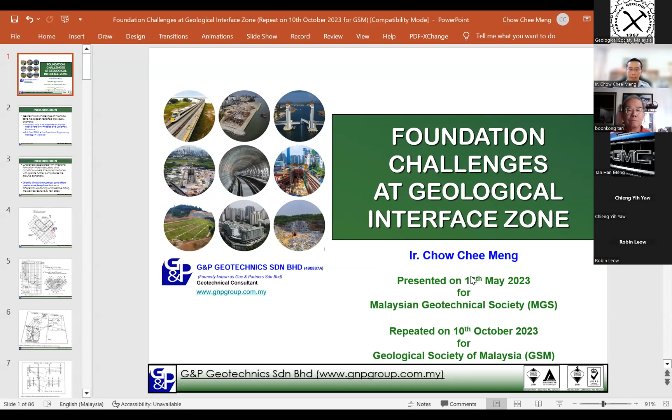All right, so the title of my presentation today is Foundation Challenges at Geological Interface Zone. Just to give a quick recap, I actually presented this same set of materials on 16 May 2023 for the Malaysian Geotechnical Society, and then Professor Tan asked me whether I could repeat it for GSM. So that's where I am today.

My presentation is from the perspective of an engineer, because my experience and training is on geotechnical engineering. On the geological aspects, I'm mainly basing it on observations and information I've obtained. Maybe some of you here would be able to give me more insights with regards to some of the information I'll be sharing today. Let's go straight to the topic at hand.

A quick introduction: geotechnical challenges at interface zones have been reported previously, for example by Mitchell in 1985 in a paper published for the Southeast Asia Geotechnical Conference. He discussed the challenges his team faced in designing foundations for the Pan Pacific Hotel on pinnacle and cavernous limestone. I believe most of us are familiar with this structure, near the UMNO building, somewhere in Chow Kit. Previously it was known as the Pan Pacific Hotel.

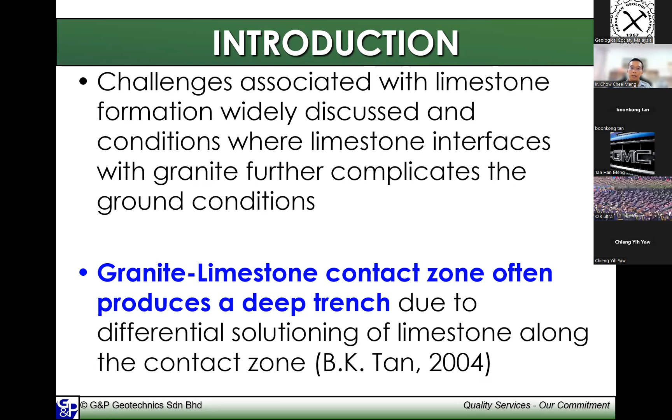Towards the top of this line, it's actually shallow - the term is shallow, where it's less than 100 feet, that means it's less than 30 meters. Whereas the moment it crosses this line, it's actually very, very deep - the limestone is more than 30 meters.

So the original building as such gives some challenge, which is very costly to overcome if the building is positioned as such, where you have big settlement at the area with very deep piles. Of course, then you have much lesser settlement at the area with shallow bedrock. On top of that, at that time in the 1980s, even now I believe, it's very difficult to form piles at depth which is very, very deep.

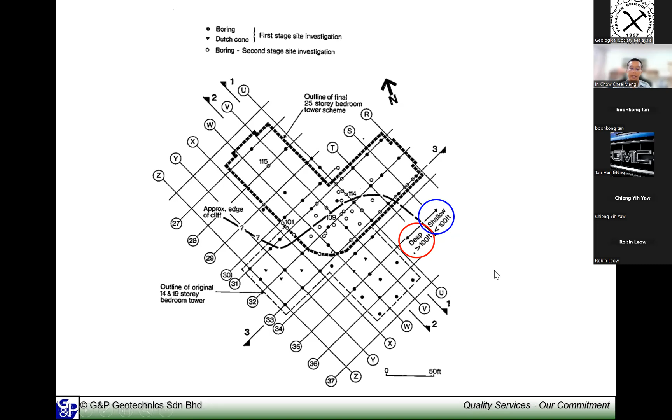So the strategy adopted at that time was that the designer decided to carry out a study on the performance of the piles. Basically, they divided it into two zones: the shallow pile, which is less than 30 meters deep, designed with a 1.5 meter rock socket into limestone, and the deep pile, which is on average about 75 meters deep, requiring barrette piles.

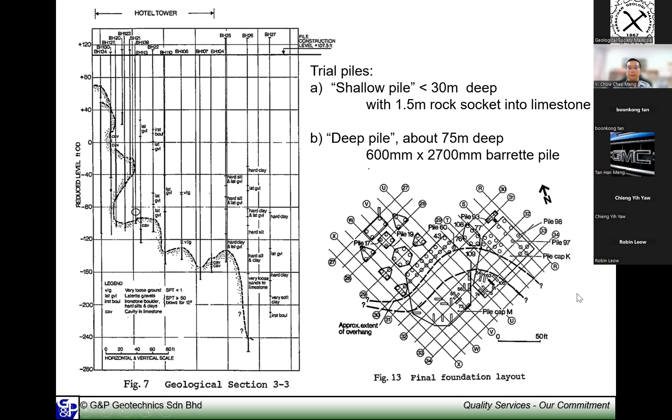I'm a bit curious about this particular approach. Probably, my guess is at that time, the design decided to avoid the contact zone because of the uncertainties with the behavior of the soil. So the subsurface investigation is concentrated at the granite zone or the limestone zone.

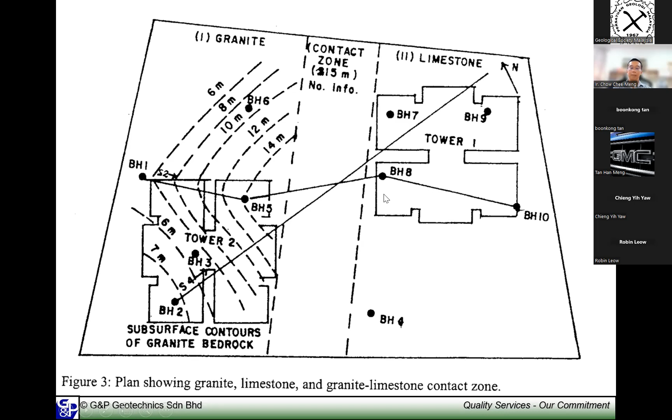Anyway, just to put into perspective, on the left-hand side of the plan, you can see the granite bedrock depth actually goes deeper and deeper as it goes towards the contact zone. The limestone level is also quite shallow, but at the contact zone, it's suspected that the level will be very deep because of the differential solutioning that I mentioned earlier. We don't have information here, but from the understanding of geology, I think the possibility is very high that the bedrock here tends to be deeper.

So from the two simple papers that I referred to in this introduction, I just want to set the tone in terms of the main message I want to convey to my fellow practitioners in geotechnical engineering or geological works: at a geological interface zone, we have to be extra careful on the ground conditions.

Just to elaborate further, what I mean is basically we cannot do business as usual based on our normal practice. In those areas, we have to put more thought into the investigation, the planning and the scope of the subsurface investigation. Even though it's a very simple tool, it becomes very important because it allows us to plan ahead and mitigate the risks and challenges ahead, rather than giving us unpleasant surprises during construction.

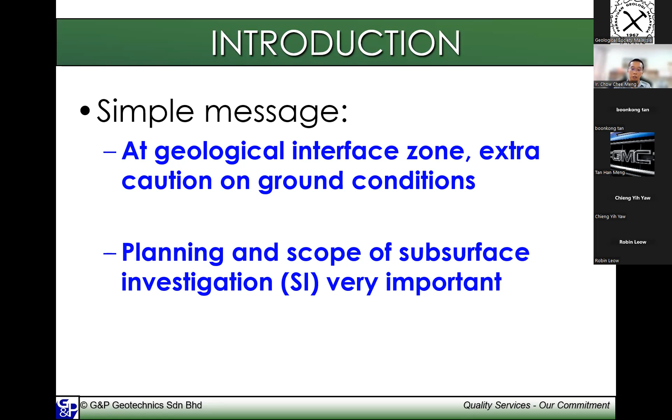Now I move into actual case histories from my own projects. In this presentation, I'll be sharing two case histories. Case history one is on the granite and limestone interface zone. I'll share the observations we obtained from the subsurface investigation information, and how, from the engineering point of view, we address the situation to make sure the foundation is adequate and achieves the intended purpose of supporting the structure and the architectural intent of the development.

For those who may want further readings about these particular challenges, the materials I'm presenting here were published in a paper in 2019 for the 16th Asian Regional Conference on Soil Mechanics and Geotechnical Engineering in Taipei, Taiwan, with my colleagues Kho Shiau Ying. The paper should be easily accessible from my company website or on the internet. Those interested can communicate with Professor Tan, and I'll be happy to share it.

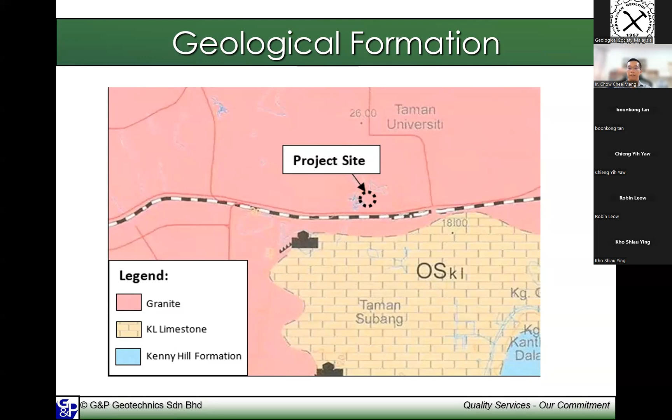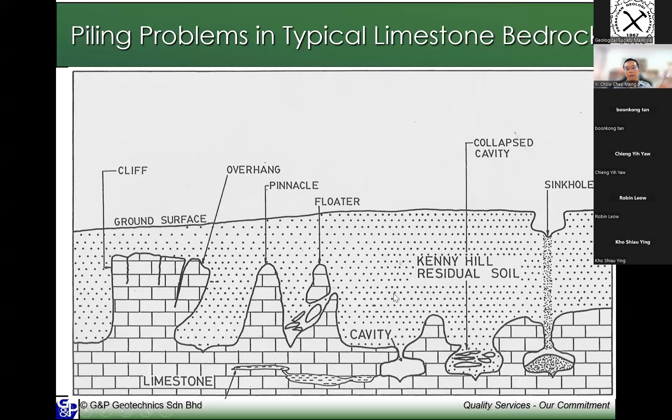So like I mentioned in the introduction, we are well aware of the problems in typical limestone bedrock. We are very worried about features such as overhangs, pinnacles, floaters, cavities, collapse cavities, etc. There are many discussions about this already. So if you have an interface zone, you have to cater for limestone at the same time as the interface zone.

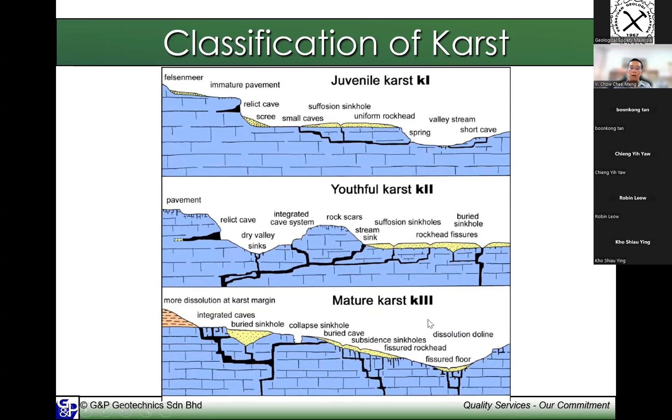The category that we describe is karst K3. I'm sure my geological cousins here are very familiar with this, and they will use this description much more often than myself. Of course, if you have complex karst, you have all these kinds of issues which are quite common in Malaysia. And extreme karst has all the different types of challenges associated with adverse features of karst.

Okay, for this particular site, actually it's in PJ near Kelana Jaya area. We were very lucky that we had a very supportive client. The client came from an engineering background and understood the importance of SI, and this particular client is not the type that saves on SI.

The moment we highlighted to them that there is a potential issue related to the ground conditions here, they asked us to carry out as many boreholes as possible, because they knew that more boreholes reduce potential problems during construction, which is true enough. From all the information we obtained, I think the construction was able to proceed relatively smoothly despite a very complicated site.

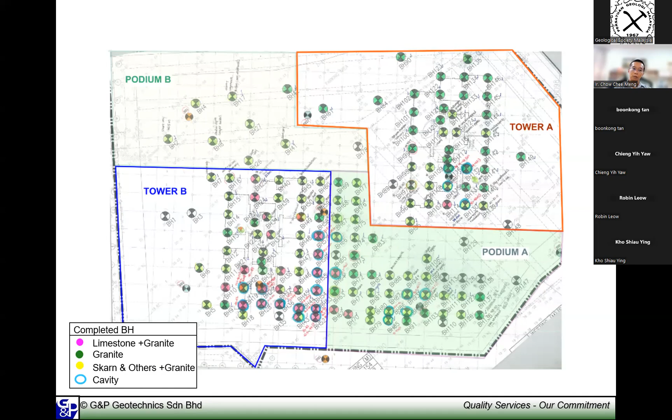But when it comes to Tower B, based on the colors shown here, we have far more limestone at the Tower B area. Even for me, this kind of situation is not something I encounter every day. Most of my projects, since my graduation over 20 years ago, I think I've only encountered such a situation 2 or 3 times throughout 20-plus years of working.

Just to show you from the bore logs, this is how my company summarizes the borehole information. We plot it to the existing ground level, and this legend shows the SPT N values, along with the major and minor components of the soil.

At the granite zone, it's nothing really too different from some of the other projects we encounter in granite zones, where SPT N gradually increases with depth. The green color is the type of granite rock we encounter from the boreholes, and the bedrock level is typically about 40 to 50 meters below ground level. Very interestingly in this area, some of the boreholes at the top show some schist just before encountering granite.

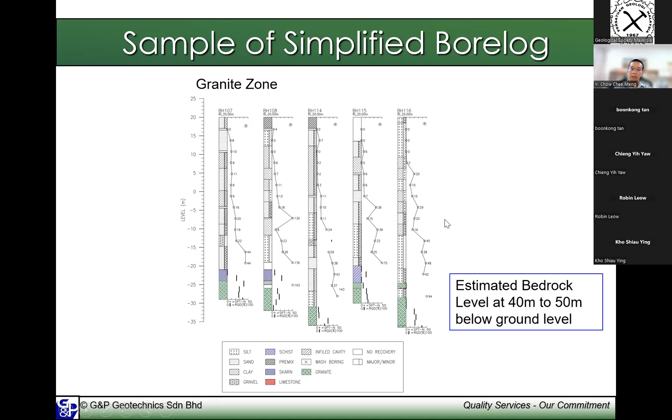So again, I do not know the real reasoning for this. Maybe the geological experts here will be able to shed some light on it, but from the observation here, there's a very clear trend in the occurrences we have encountered.

Now, the interesting part is the limestone granite zone. The red color shown is the limestone. If you look at the plan, it's not consistent in all the boreholes - some of the boreholes have it. These are extracts of some boreholes where we encountered limestone floaters.

The challenge here is that the level where limestone floaters are detected varies. Some is as shallow as 20 meters below ground, some is deeper, about 40 meters below ground, with floaters only between 20 to 35 or 35 to 40 meters. The thickness also varies - some are relatively thin, maybe 2 to 3 meters, but some are as thick as 20 meters.

The problem with this interface zone from a foundation point of view is that we do not know how widespread this thickness is. Secondly, after coring through the limestone, there is a considerable thickness of soil beneath it - definitely more than 5 meters, close to 10 meters, some definitely more than 10 meters. The SPT N values are quite low, in this case 7, 11, and 14. This one is typically less than 20, in the region of 16 to 20.

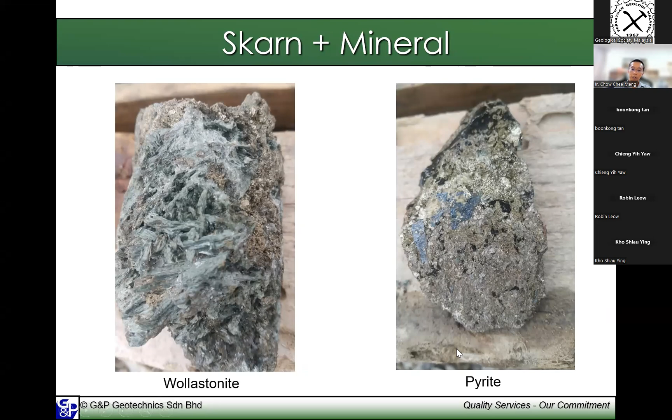For this particular site, because of the interface zone, besides granite and limestone we have different types of minerals and skarn that we have encountered. Here we have wollastonite, according to our geologists. We also encountered some pyrite, fool's gold, and some breccia as well in the interface zone. So we have all different types of rocks and minerals.

One of the challenges we have to overcome from the geotechnical engineering point of view is that because there are a large number of floaters which vary in thickness, extent, and nature, the piles are designed to socket into competent granite bedrock. That means we do not want a situation where some piles go to granite bedrock while some sit on the floater, causing different settlement. The strategy is to bore through the limestone.

Of course the result from the SI is very convincing. This is a value from the SI. The result from the SI is very convincing, and as the project team we were also able to work out what the cost impact to the foundation would be. Despite this, the project is still viable, and I think it's very successful because phase one of these 2 towers is completed, and they are launching the new phase as well.

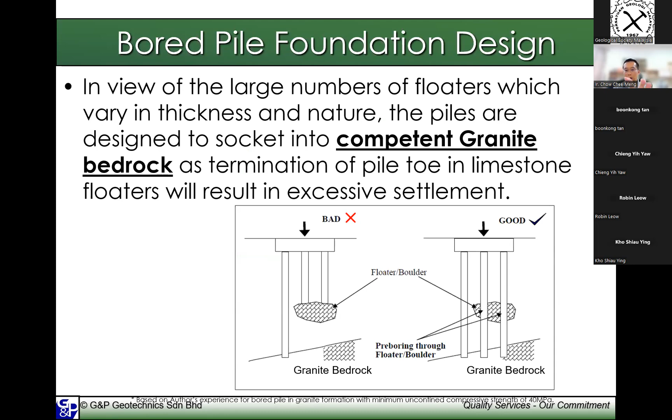Once we agreed on the approach towards the design of the foundation, we wanted to verify the performance of it, whether our assumptions are valid or not. The design parameters we adopted include the shaft friction in soil, 2 times N value. The shaft friction in granite is based on 1,500 ultimate value, based on our experience for bore piles in granite formation with minimum unconfined compressive strength of 40 megapascal.

We usually limit the end bearing to about 15% of pile working load to limit the risk, because the end bearing for bore piles depends very much on the contractor's workmanship. If the contractor is willing to clean the bottom of the bore pile better, the end bearing can be very high. But because of constraints in time and productivity, we have to make a judgment to limit the end bearing to a certain percentage that is low enough, so even if they don't achieve it, the foundation will still be safe - while still being economical.

Another tool we use quite regularly to determine the competent bedrock - historically, many years back, how supervisors verified the construction of bore pile rock sockets was based on the supervisor's experience. If the rock felt sound enough based on how difficult the machine could core through it, or the sound of the coring, he would accept it. As you can imagine, there's a lot of subjectivity, a lot of contractual arguments. Of course the system is not perfect, but we try to reduce such arguments.

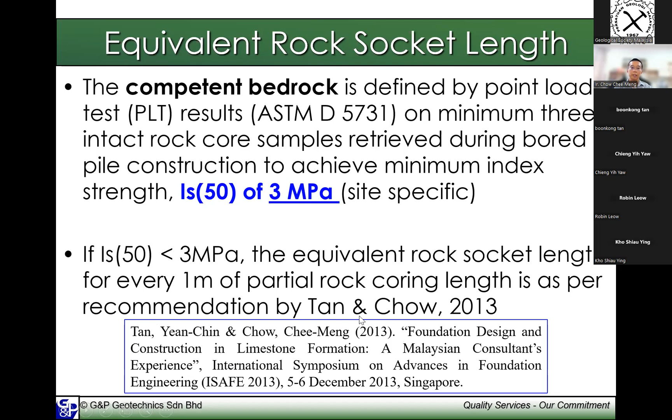So if you encounter materials less than 3, it doesn't mean they're not considered rock socket, just not full rock socket — equivalent to 60% of it only. So if the original design is 3 meters, they have to lengthen it by more than 3 meters, probably close to 5 meters. 3 divided by 0.6 is close to 5 meters.

But we note to the contractor that since this material is of lesser strength, they will only get paid based on the original 3 meters, even though they may be drilling 5 meters — they still only get paid for 3 meters. This is important, otherwise you can't control the quantities with certainty during construction, and there will be a lot of variation orders. The key is that this is communicated clearly and early to all tenderers so they know what they're pricing for.

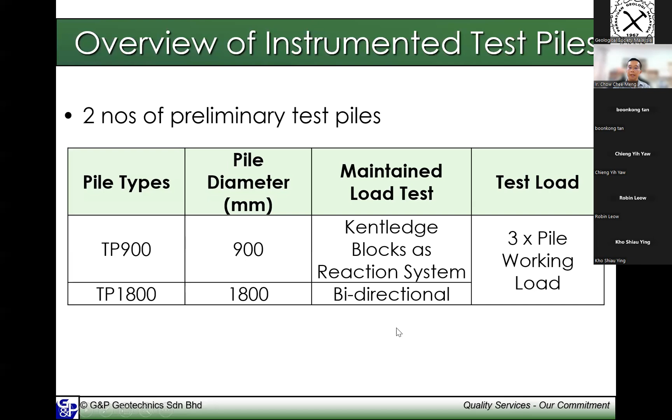This shows typical instrumentation. We always instrument with strain gauges and telltales to monitor settlement and mobilized capacity — similar sets of instruments, strain gauges. The difference here is we have the hydraulic jack for bidirectional tests, because the test load will be very high, so bidirectional is more practical. In fact, I don't think it's safe to use kentledge for such a large pile diameter and large test load.

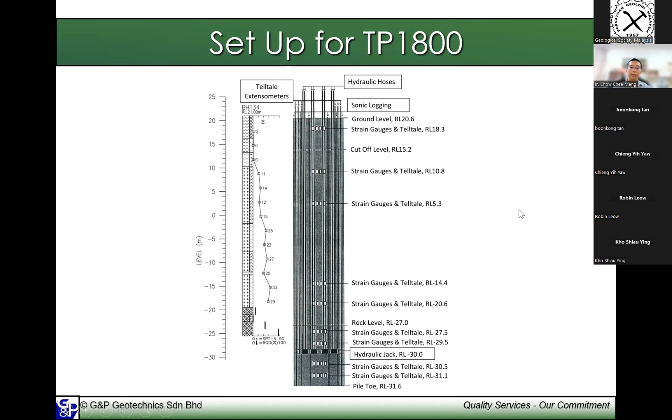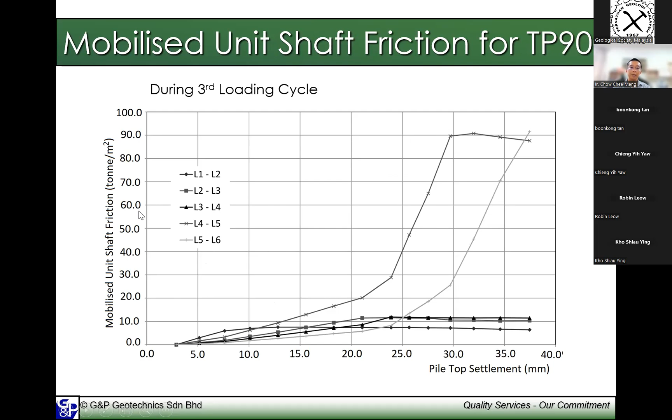So this is the typical results we obtained. This shows the level of the strain gauges. As you go deeper, at the rock, this gets about 900. Soil is close to about 100 kPa or 10 tons per square meter. End bearing for 900 diameter achieves about 35 millimeter settlement — this is what I meant — end bearing for a bored pile usually requires quite large settlement before it mobilizes the end bearing. This one settles about 35 mm and mobilizes about 3000 kPa.

For the bigger pile diameter, bidirectional test, you can see the rock shaft performs better, close to 1400. Soil is about 150 to 200.

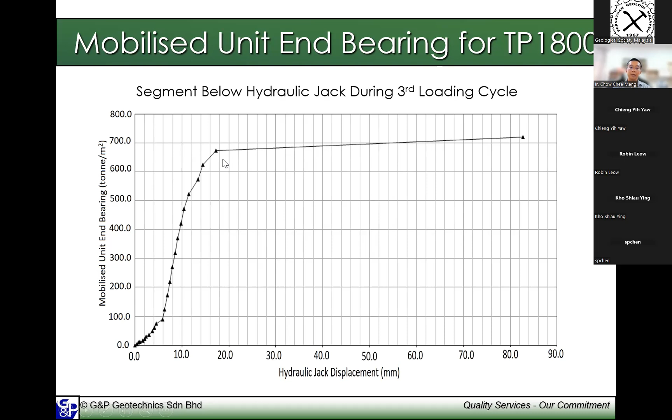The same thing, because we have 2 portions of the instruments. The rock below the hydraulic jack also reaches about 1300 to 1400 of rock friction. And here, for this particular pile, 1800, you can see that it achieved much better end bearing. It can go as high as close to 7,000. This is 700 ton per meter square, that means 7,000 kPa. So it reaches during the 3rd loading cycle.

Whereas, as I explained earlier, on end bearing, because of uncertainties in the workmanship, you can see that the range can vary quite widely, from as low as 1,900 for this particular pile, 900 diameter pile, to as high as 6,750 for a bigger diameter pile. One thing we can observe is that for TP1800, the soil friction is much higher, but we don't believe this is true because we notice slight pile bulging on the top portion of the test pile, which may have contributed to the exceptionally high value of shaft friction.

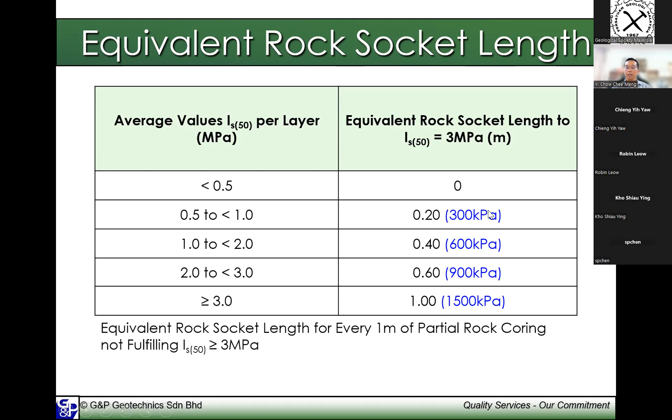Despite this, later on I will explain both test pile results here show that the design parameters assumed are well represented to the ground condition when we adjust it based on site obtained IS value. What I meant is that if you recall earlier, our design is based on, if you encounter a point load strength of more than 3 megapascal adjusted for the 50 millimeter diameter size, then the assumption is that it should achieve about 1,500 kPa of friction. But if you have more weathered materials, then the assumption is that you should reduce the frictional capacity of the rock as well. And this is what happened.

You can see from the 900 diameter piles, in fact for the upper layer, the point load, we know that we get about 900, close to 900 kPa of shaft friction. And if I divide 900 by 1,500, the ratio is about 0.6. And therefore, if I divide my calculated equivalent rock socket length, 1.47, by the 2 meter here, I actually get 0.7. So if we use a method where we adjust the rock socket, we will be getting very similar performance. That means it's in order.

And if you look at the other pile, why the friction is higher, in fact the IS value is consistently quite high, from more than 4 to about 8. And that's why we get frictional value much higher, close to 1,400. And if you talk about the actual equivalent rock socket length, it ranges typically about 0.9 and matches closely with what we have assumed as 1. That's why the summary is that the approach we have adopted, based on equivalent rock socket length, works well because the shaft friction tallies with the point load test results with some correlations on the recovered rock during bore piling works. I think this is a very important message.

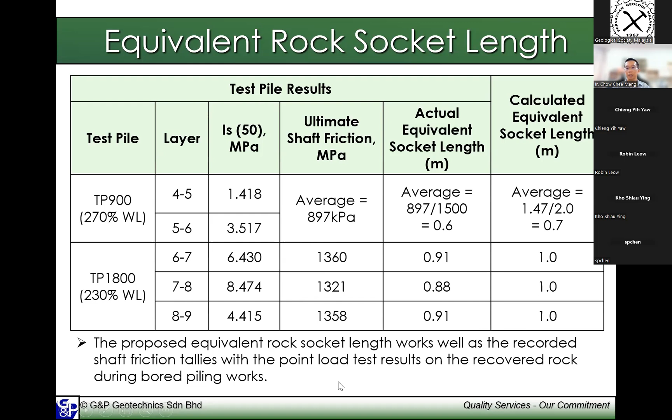So the conclusion, a simple conclusion for the first case history, before I move on to the second case history, is that at Kuala Lumpur limestone granite interface, we encountered limestone floaters with irregular thickness. So again, the message is very simple. It's very important to have adequate rock coring depth during soil or ground investigation works.

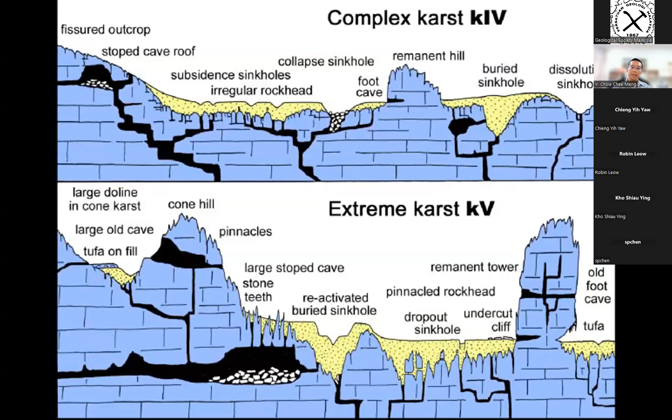And you only can do that if you are looking for it. Just to recap, for example, if you don't look into it, you may be thinking, all right, I terminate my borehole here, and you design your pile as limestone. This can be very dangerous because ultimately, in certain situations, let's say during construction, you actually encounter this while you're doing the bore pile, you puncture through it, then you have a lot of question marks. So these are the important things that you must look out for.

So the bore pile foundation system was selected to socket into granite bedrock, and the instrumented test results match well with the assumed design parameters. And one important message is that it only matches well when you use it in conjunction with the adjusted rock socket length based on site obtained point load index strength, which I think is a useful tool to adjust the rock socket based on the degree of weathering or strength of the granite rock encountered.

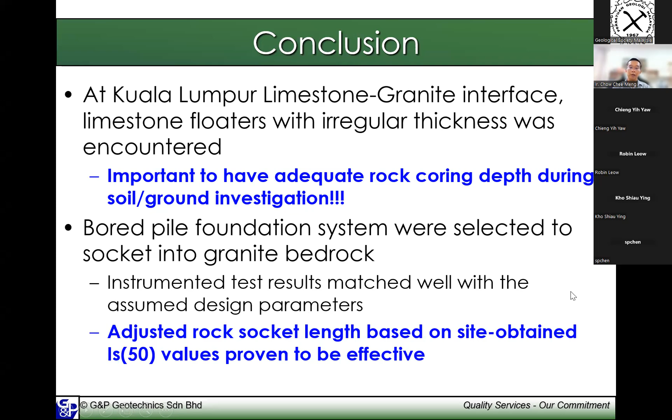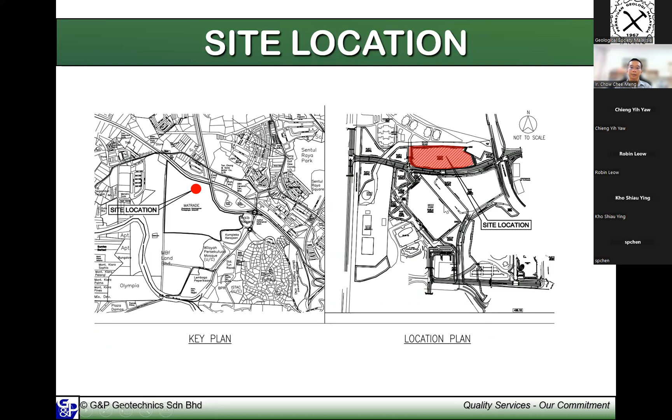Okay, for my second case history, it's slightly different. Just now was on the limestone granite. This is on granite and Kenny Hill interface zone. This particular site is not too far from MATRADE. From the geological map, the site location indicates that it's near to the granite Kenny Hill formation interface zone, and in fact not too far from limestone as well. But in this case, from the SI, we didn't encounter any limestone.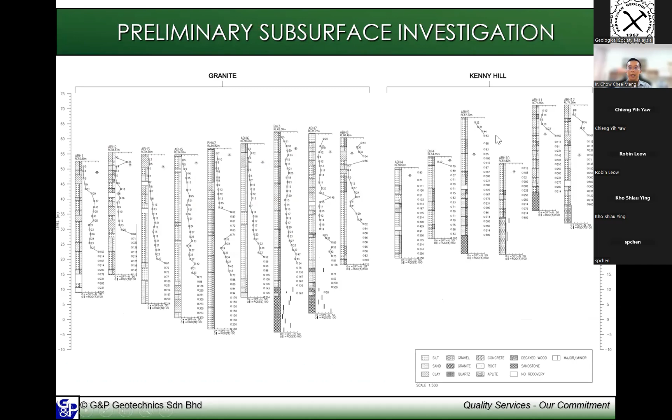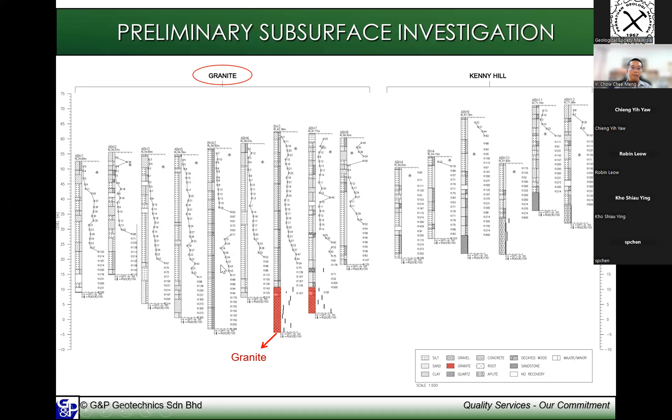What we meant by that, you can see from here - these are some typical borelogs between the granite zone and the Kenny Hill zone. For the granite area, some boreholes encountered granite, but the rest, despite going to depths close to 60-70 meters, have not encountered any granite - it's completely decomposed granite with very high SPT-N values. Whereas for the Kenny Hill area, the main difference is that the hard layer is very shallow, and we encountered different types of materials - sandstone, and weathered rock with SPT-N more than 200. I'll show you a more close-up view with two typical borehole information to further illustrate the differences.

You can see from the engineering point of view that what we have to tackle is that in the granite area, the hard layer encountered - when we say hard layer, we define it as SPT-N more than 50, because that is a suitable founding layer and where the pile derives the most capacity, meaning the most efficient layer to derive pile capacity - ranges from 28 meters to 36 meters below ground level.

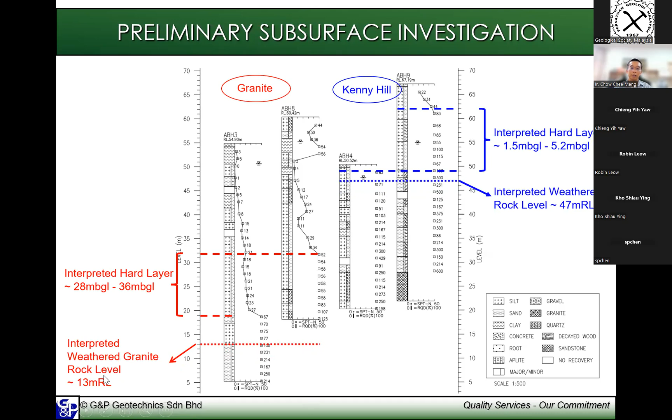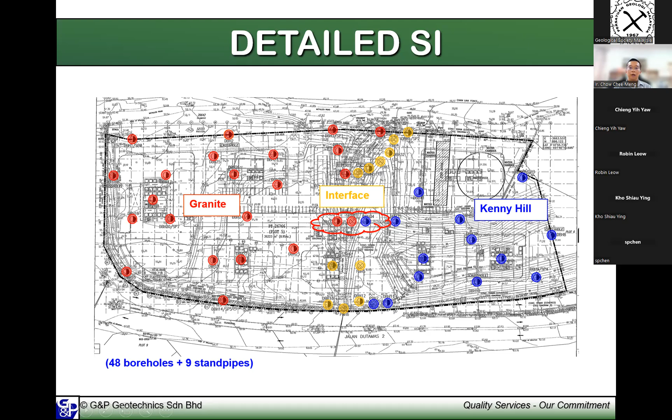For the detailed design of this project, having established that there are two distinct geological formations at this site, I've color-coded the red boreholes - their soil profile characteristics are closer to the granite, so we term it the granite site. The blue color is the Kenny Hill site as shared earlier. In between, at the interface zone, we have behavior which is a mixture of both granite and Kenny Hill. What I mean by interface zone is that you have some soil layer going down, then the hard layer is in fact deeper.

Immediately next to it, you can see that this is Kenny Hill zone. Again, the hard layer is very shallow. In this case, at the interface zone, the hard layer is deeper. But the moment we encounter hard layer, it exhibits characteristics quite similar to what we encounter in the Kenny Hill zone - a zone of materials with SPTN more than 200 before encountering granite in this particular zone. So here we have to devise a certain approach in terms of how we design the foundation.

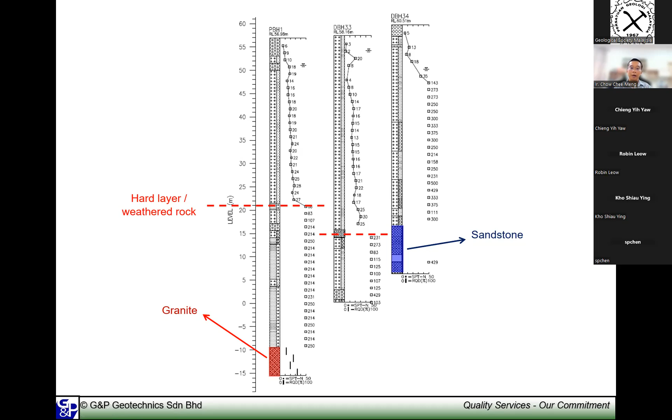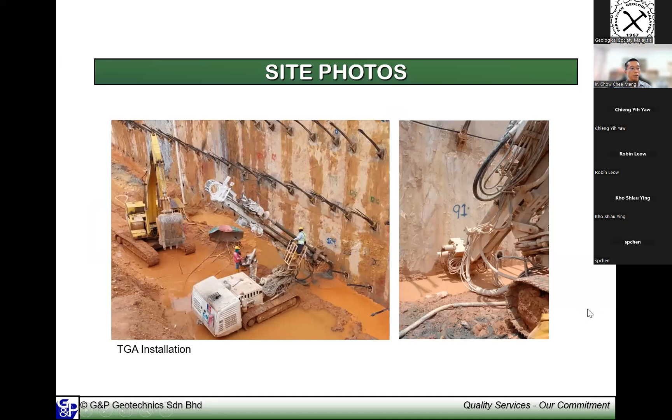So just to share some site photos, we have some diaphragm wall that we've constructed for the basement excavation. This site utilizes temporary ground anchors being used in the construction of the works. Some of the wall required buttress to control the deflection. This one is exposed diaphragm wall with temporary ground anchors with buttress as well.

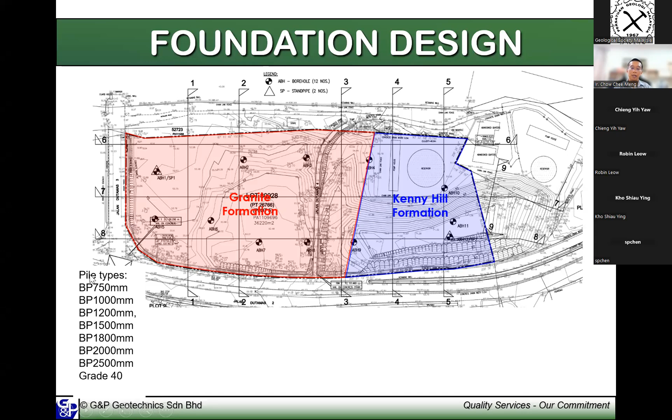The main task for us as the engineer for this project is how to design the piles. We have to balance between safety and cost effectiveness. In this particular site, we are using bore piles again because this is a high rise, and the ground condition and basement necessitates the use of bore piles. These are the sizes we've used, from 750 to 2.5 meter diameter.

One of the useful tools we have is we carry out 3 numbers of preliminary test piles. You can see from here why we have 3 numbers. For preliminary test pile 1, it's mainly to study the behavior of the bore pile in Kenny Hill formation, 1.2 meter diameter.

We have to debond it because when we do the test pile, it's at the original ground level, but the layer which we're interested in is actually after the excavation levels. That's why we have to debond it 16 meters to correspond to the excavation level. For PTP2, it's mainly for the good soil in the granite area.

You can see here the pile is deeper because if you recall some of the boreholes shown earlier, some of the piles can be quite deep, yet we don't encounter any bedrock. So this is to test those areas - that means, let's say we go deep enough, and then we rely on the soil. Here we only have 0.5 meter of rock based on actual condition.

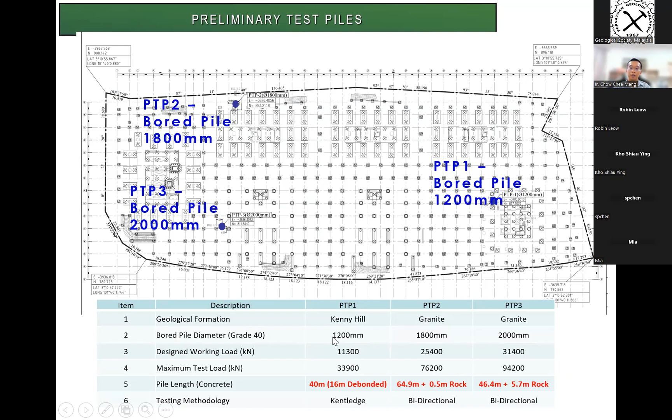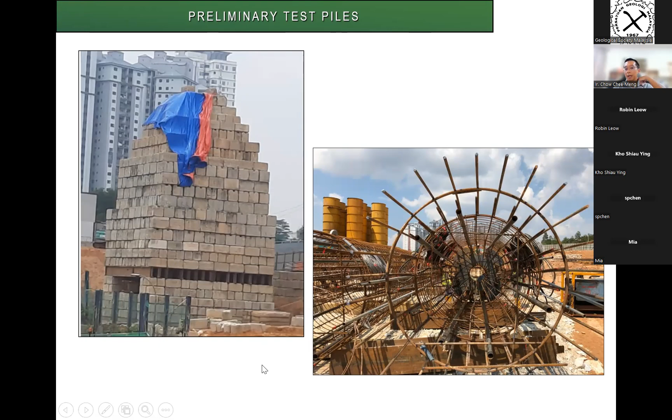Whereas for test pile 3, it's the area where the granite rock is encountered at a shallower depth, so we have 5.7 meters of rock socket. For the kentledge, I think this is the practical highest level we can do for 1.2 meter diameter. This is very high, and at the point in time it looks kind of scary as well, with a lot of work by the contractor to stack this up. These are all the instruments we place on the bore pile to measure the mobilized friction on the piles.

If you look at the results for preliminary test pile number 1, I mentioned earlier we debond it. Why do we need to debond it? Because the nearest borehole around this area has a lot of soil material here, but once we excavate down, this is the level which we do the test pile. The basement actually is this deep, so the behavior we're interested in is within this area. That's why we want to debond it and test the soil materials relevant to our actual application.

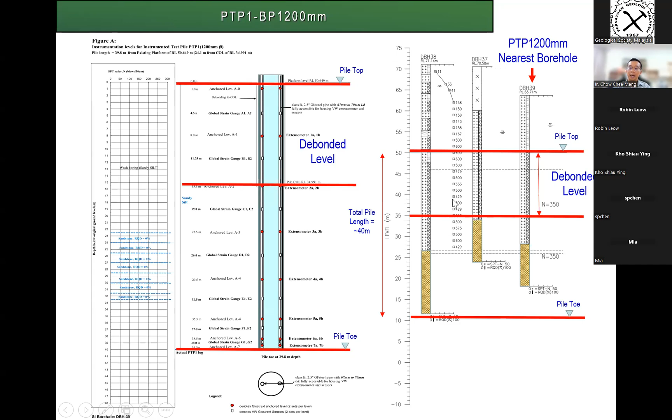So the result shows this kind of information. Let me give you a quick recap. In this Kenny Hill formation, we mainly design it as a bore pile in soil with a certain fixed length, so that is warranted. If you can see from here, despite SPTN more than 400 for that material, the friction ranges from about 150 to about 500. Some of them are very low, I think disturbed because it's close to the debonded area.

And end bearing, you can see because of the Kenny Hill material - one thing I've always observed for Kenny Hill material is the slake durability is very low. That means upon contact with water, it tends to lose strength quite rapidly. So you can see here, especially when you compare with the granite earlier, the end bearing that has been mobilized is quite low, talking about 400 something only.

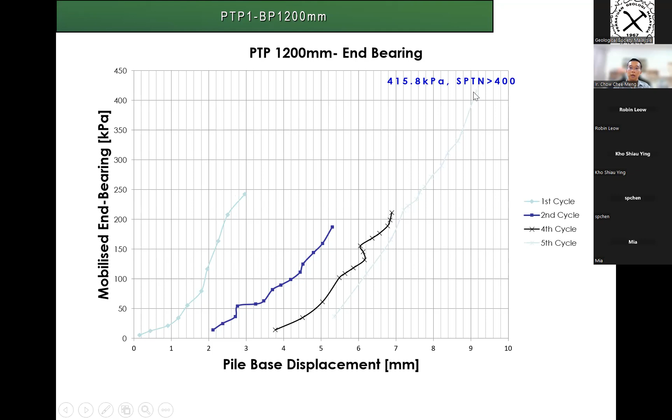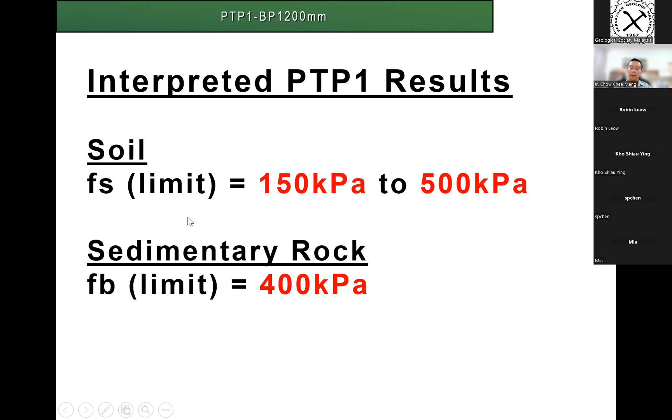So from the result, you can see that the friction in the soil ranges from about 150 to 500 kPa, and for the sedimentary rock, the base bearing capacity is only about 400 kPa. So what we do is that there's a lot of value in carrying out the prelim test pile. You can see these are on the left column here.

Okay, so you can see from here, the original design parameter is about 2N, friction is about 250, and the rock we assume 700. Then of course we adjust this again. But after the test pile, we actually retain it for the soil 2N, but for the limit of the soil friction, from the result, we can upgrade it to 350. And if you do encounter very good rock, more than 3 megapascal, we can actually use higher, but this is not encountered.

So, in fact, based on the piling record, equivalent rock socket length based on point load index is hard to achieve because most of the time, the materials that we took out here are actually very fractured, so there's no meaningful result from strength. So at the end of the day, the design is based on a fixed length.

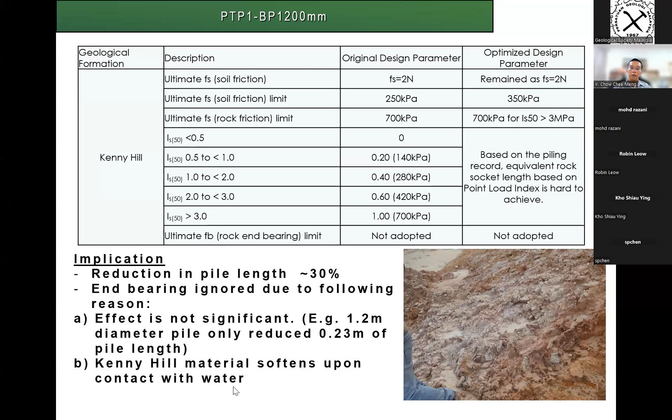Even based on that, from the prelim test pile result, we managed to reduce the pile length by about 30%. End bearing is ignored due to the following reason, because the effect is not significant. Let's say, for example, 1.2 meter diameter only reduces 0.23 meter of pile length. And we know that Kenny Hill material softens upon contact with water. So again, these are the observations from the test pile results.

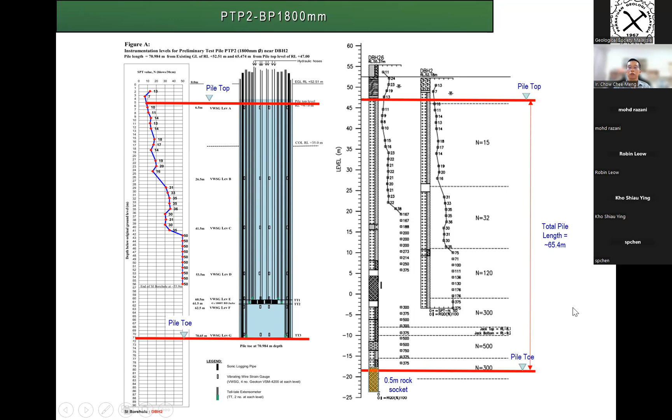Whereas for the other two prelim test piles, again, I mentioned earlier, mainly we are testing in granite layer. We have very good materials at certain depth. You see, this is our interpreted design value, N15, 32, 120. We have some 300, 500, etc. And then we have a little bit of a rock socket. Total pile length here is quite deep, about 65.4 meter.

And from the result, you can see that these are typical results. I won't go through too much into here, later on I'll summarize in the table. So you can see again from the soil, the frictional resistance is about 200 in weathered granite. So similarly, below it, I'll go through quickly here, but one thing you can observe is that, of course, in granite, the base resistance is much higher, in this case, 11,000.

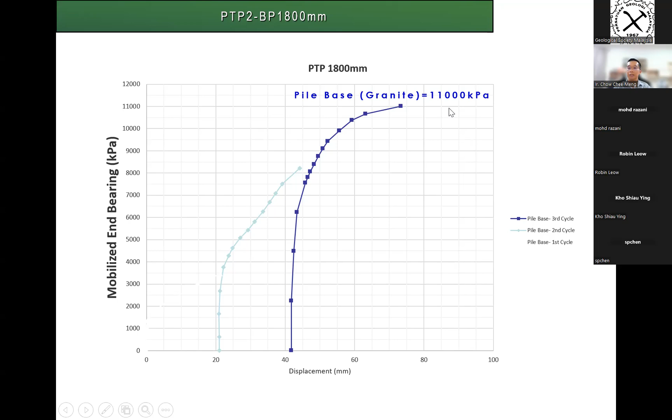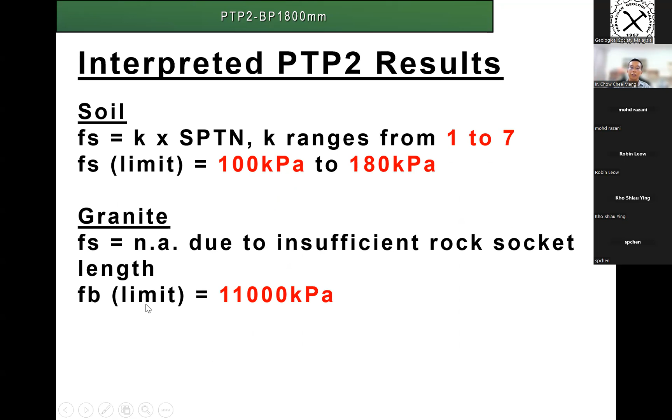So in summary, the correlation for friction to soil ranges from 1 to 7, and the limit for the soil resistance is about 100 to 180 kPa. Again, you can see there's a big difference in terms of numbers between this soil material and the Kenny Hill formation. And in this case, we cannot verify the rock friction, but we know the end bearing is about 11,000.

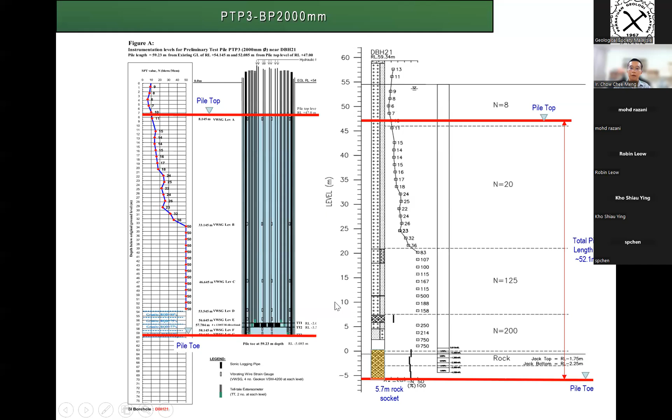Whereas for the other test pile, BP2000, we purposely socket more into rock. We want to find out more about the behavior of the granite rock. Again, these are some of the typical results. I won't go through too much into it, I will just summarize it in the table shortly.

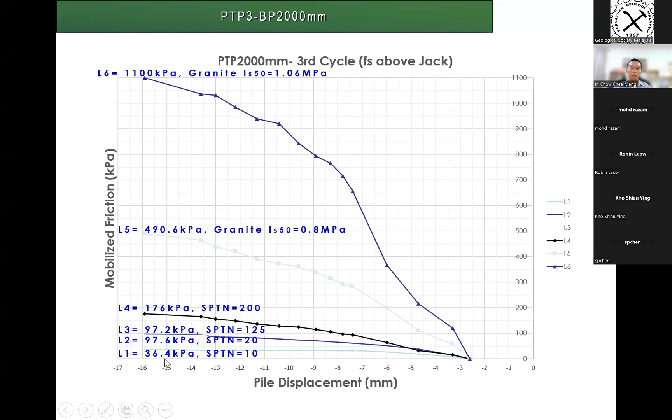So you can see the rock friction, of course, is higher. Even IS only about 1, we get about 1,100. So lower IS, of course, we get lower, about 500. For soil, we get about 40, depending on the SPTN value, to as high as about 180. So end bearing, quite similar, we get about 11,000. So friction, for IS more than 3, we get 1,500. You can see there's a clear correlation with the index strength, or IS.

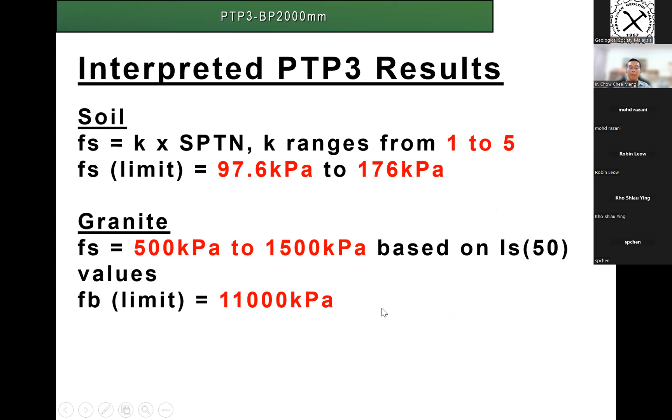Again, as a quick summary, the friction ranges from 1 to 5 times of SPTN, and the limit of the soil friction ranges from 100 to 180 kPa. Whereas in granite bedrock, you can see the friction ranges from 500 to 1,500 kPa, depending on the point strength index values that we have obtained. And the limit of the end bearing is about 11,000, similar to the earlier test pile results.

So, but if you look into the test pile results, despite you can see the uncertainties with the performance of the end bearing, this is very important for engineers. Normally, we design a building to make sure the settlement does not exceed 12.5 mm for a single pile.

You can see from here that even for the 1,800 pile, it can mobilize 11,000, but at a settlement of close to 80 mm. Whereas the other pile seems to mobilize 11,000 at a very small magnitude, just 5 mm.

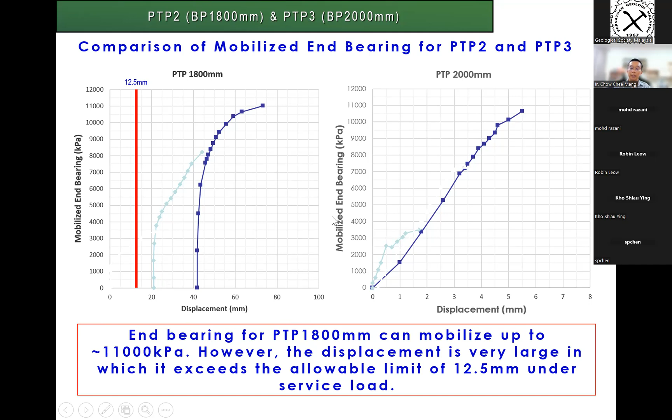This shows again the uncertainties of workmanship, which is why we have to make a judgment. Even though theoretically it can go very high, we have to limit it to cater for the difference in workmanship. So in summary, for the design parameters, we maintain soil N at 2, and the limit of soil friction we also maintain at 150. We can see from the test results it can go slightly higher, but I think 150 is appropriate.

For the rock friction, we can adjust it. Maximum 1,500, but based on the IS value we can actually adjust it. Instead of downgrading to 0.6 or 900, we can use higher values, 1,200, 900, and 450, based on the preliminary test pile results. And for end bearing, we can increase it based on the results again, from 3,000 to 6,000. There's a reduction of pile length in rock of about 30%, which is quite significant.

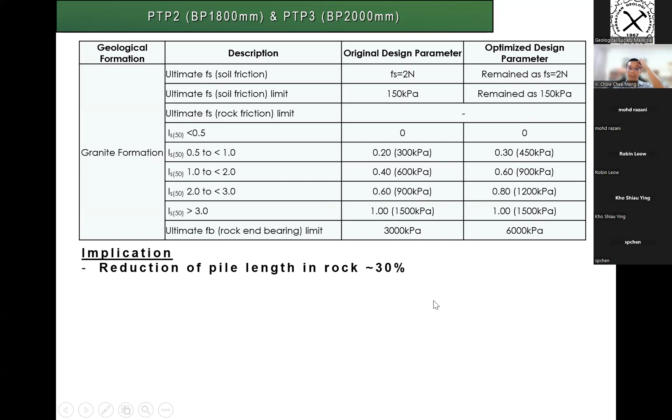So in summary, you can see the value of the preliminary test pile. If you look at the original design prior to the prelim test pile, the pile length is about 24 meters for a typical case. Then we optimize it to 17.5 meters. There's a reduction of 6.5 meters in pile length, or 27% of the overall pile length, which is quite significant.

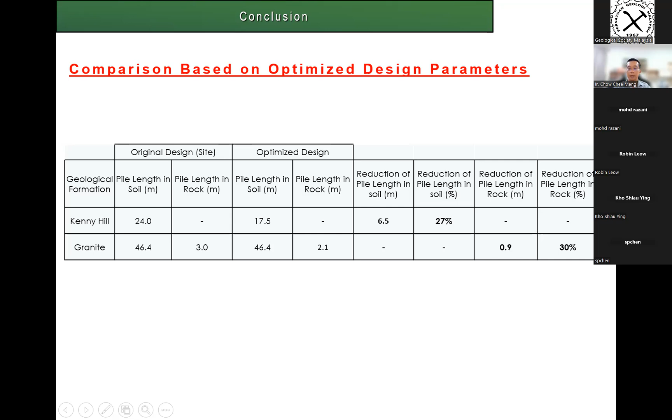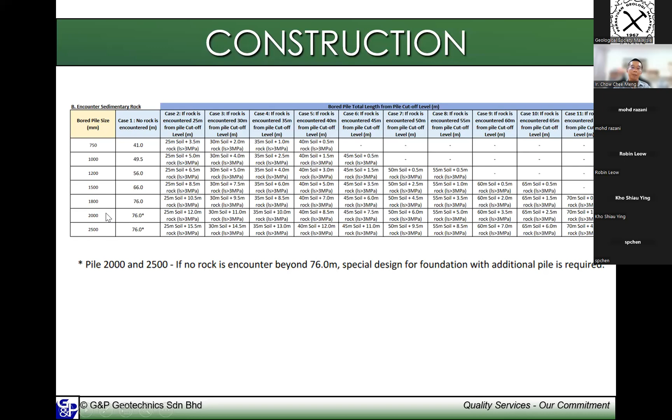In fact, if you have very long piles, because of the limitation of the machinery, we have to adjust it accordingly, adding more piles for big diameter piles, because there's no way the contractor can form very deep piles.

I'm near the end of my presentation. As I mentioned earlier, my approach is that I want to share some observations on the interface zone, and I'm sharing with you how an engineer tackles this particular issue. But my message is very simple. One simple but often overlooked message is that the SI is very important, especially when we know that the soil condition, the geological and geotechnical condition at the site, is complicated.

SI, compared to the overall construction cost, is actually a very small portion of it. I don't think it makes sense to save on SI. And again, of course, there are huge benefits in carrying out the instrumented test pile, in terms of verifying the engineering assumptions on the design of the piles.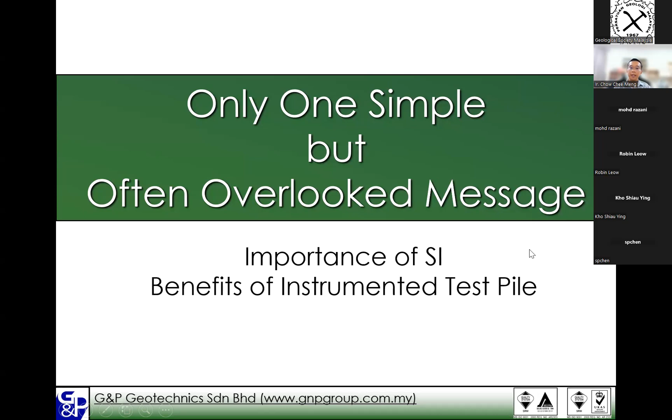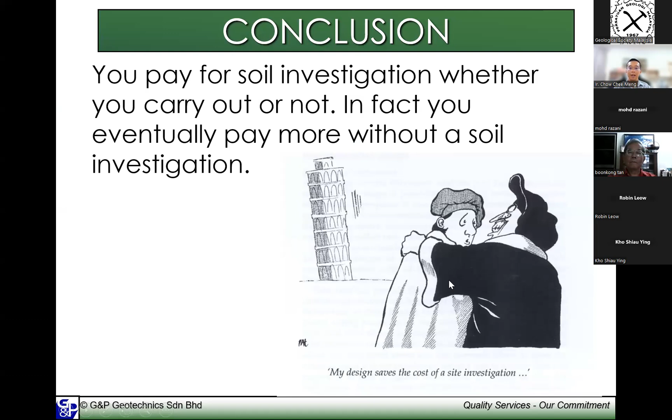So I like this particular drawing in one of the publications by ICE, where they said that you pay for soil investigation whether you carry it out or not. In fact, you eventually pay more without a soil investigation. Of course, they are making fun of the problem faced by the famous Leaning Tower of Pisa.

In fact, the ICE published this in a report by the Ground Board, the Institution of Civil Engineers of UK, simply titled Inadequate Site Investigation. Two of the principal conclusions are delay and escalating construction costs, mainly due to inadequate site investigation. The consequences of inadequate SI are not only severe during design and construction stage, but can be even more serious for full life costing.

That means, in other words, for example, the Leaning Tower of Pisa - your foundation starts to have problems, then only you try to rectify it. The maintenance, the cost of underpinning, of rectifying the initial problem, can in fact be even more serious in the full life cycle of the particular building construction.

So with that, I thank you for your attention, and I'll be happy to discuss if there are any opinions that you want to share with me today.

Thank you very much, thank you Engineer Chow. A very interesting presentation, case studies. Okay, let me open to the floor for questions first. I think our good friend is Robin Leow - he's our resident guy who asks a lot of questions. Okay, you can start the ball rolling, Robin.

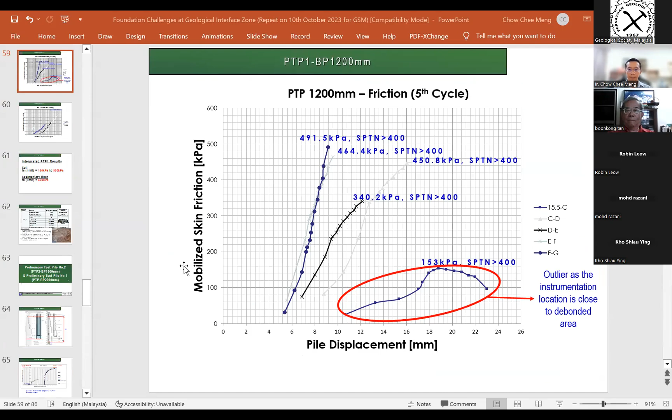That's one thing, but the interface is even deeper. Now, this granite is Triassic, Kenny Hill is Carboniferous Permian, so the granite is younger. So this younger granite, the contact between this interface here, is a contact metamorphism.

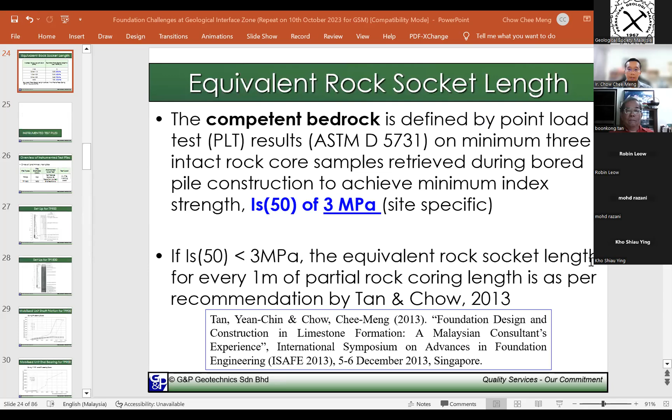So just now I was wondering whether these are cavities, but it appears that these are limestone floaters, it seems. Are these limestone floaters? So this part, why are they floating? So this part is actually these are skarn - these are what they call weathered skarn.

This has got to be skarn, weathered skarn - you mean which one you're talking about? We have skarn encountered, you see what we have. Yes, what we have, because at the bottom here these are granite. Yep, this is limestone. Yep. So granite, limestone - yep, so in between there must be skarn.

Yep, in between skarn, so these are actually weathered skarn. You mean below the limestone? These are weathered skarn material. It has got to be - these are weathered skarn material. So the thing is...

Like Professor Tan's paper just now, he was mentioning at the interface, the granite-limestone interface, there's a trench. Same thing here - this is granite-limestone. Same as before, granite-sandstone, there's also a trench. At the interface there must be a trench. What I'm trying to say is that the contact metamorphic material is less resistant to weathering.

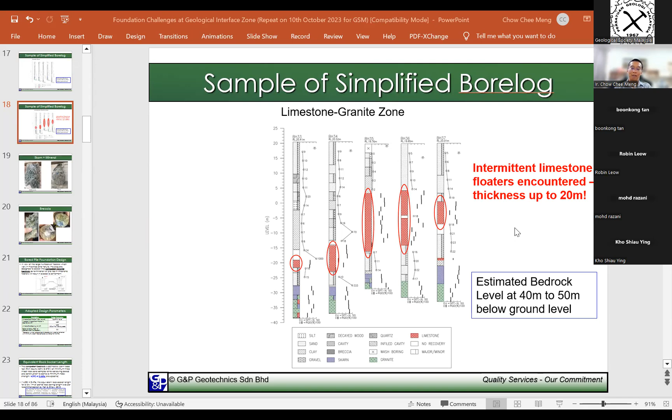Yes, it's supposed to be harder, but in this case it weathers more. I do not know why. That's why I'm only presenting the actual observations that I have. I must admit I do not understand the mechanism that has resulted in such characteristics. Very interesting.

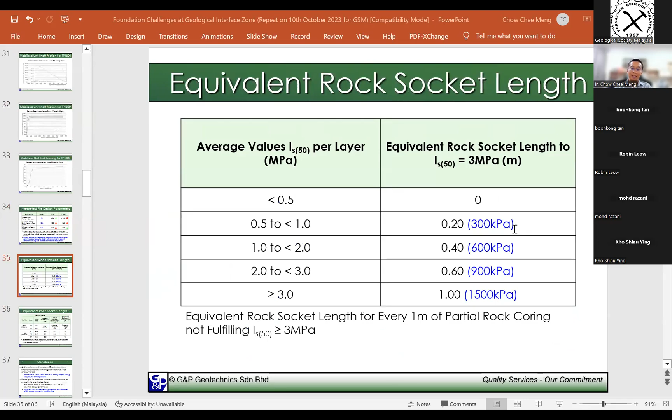Very interesting. Maybe some of you can initiate further research to understand better. I'll be happy to share my SI information, the lab test results, all those things, then maybe somebody will be able to give a better story of how all this came about.

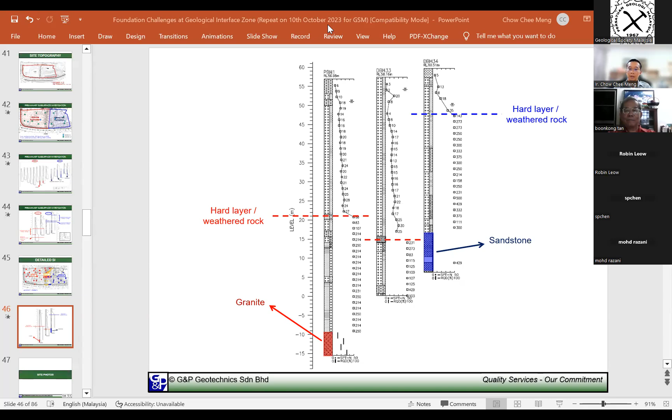Any questions from you? Thank you very much, Dr. Chow. Very interesting talk, and I enjoyed it very much. But it is a non-geological question actually.

Whether we are engineers or mineral resource persons, we always need to do site investigation work. Being an engineer or geologist, we try our best to plan a program that can get the maximum information to enable us to contribute to the design or future development of the site. But very often we do not control the purse string, and the client is the one that controls the purse string. That's how Engineer Chow was very lucky - he has an engineer client that allows him to drill 110 boreholes at the site.

But very often the resources available to us - this is the first thing they want to cut for a project. They don't cut construction costs, but they always cut the investigation costs. So in the case where, say, to gather the information I need to drill 50 boreholes, and the client says no, based on what the first few holes showed, 25 is enough - how would you deal with such a case, Dr. Chow?

Yeah, I think this is a very real problem. I think everybody in this industry, either as a geologist or engineer, faces this. I think especially when we are talking about some clients...

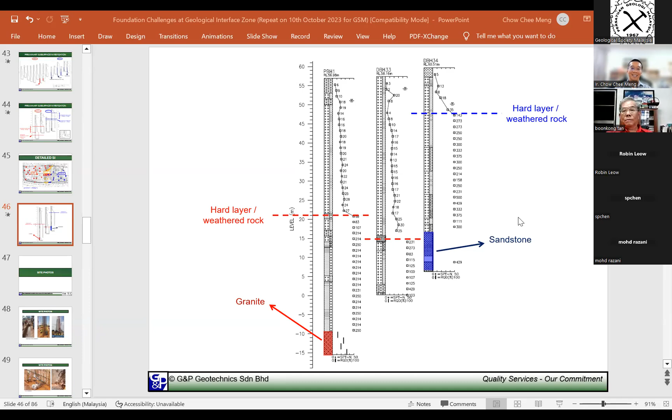Okay, I hope I've shared some insight. Of course, unfortunately, I must say I do not have a solution that can solve all the problems. My only hope is that more and more decision makers come from a technical background - more technocrats - then our life will be easier.

I think one of the problems, thank you very much for sharing your experience, but one of the problems is they say, okay, we don't have enough money, so I cut your budget for the work. But ultimately, when the project encounters a problem like what you mentioned, they will go back to us and say, hey, you're a geotechnical engineer, why didn't you see this problem?

Agree with you, Mr. Chen. That's why our thinking is, my experience is that one of the important things is that we should not be afraid to share

opposite opinions with the client. Some may say that if I talk like that, it means telling the client, if you don't do the SI now, these are your potential problems. Some may feel it's not good to talk to the client like that, but I feel this is very important because it's factual. I really highlight it to him because eventually, if things really go wrong, at least you have pre-highlighted it to the client - you don't shoulder the responsibility. Most of the time, when a problem occurs, the client may say differently - he'll say you should have told me at that time these are the problems I would encounter. Even if you told him verbally, not in writing, he may pretend to have forgotten it, and turn around and say if you had told me, I would not have saved on this kind of SI - you should have told me, you are the professional.

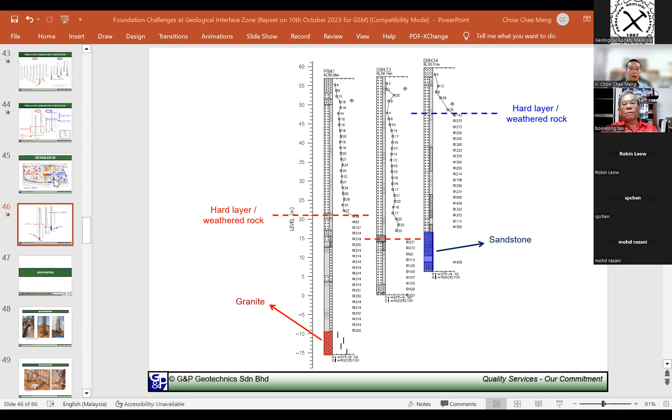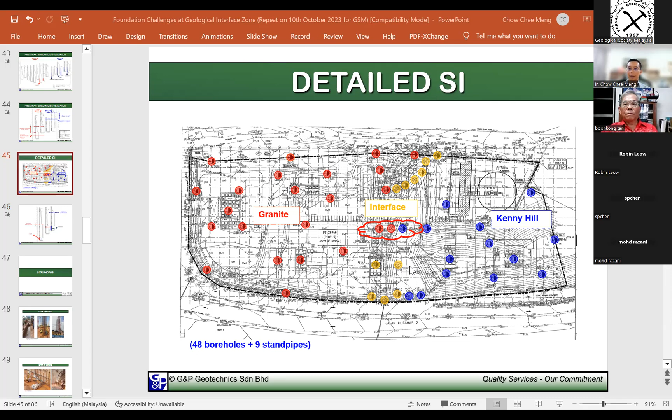Just to give an illustration, I'm not sure, Prof. Tan and all the experts here, maybe correct me if I'm wrong, but what do you mean by geological mapping? Earlier in this presentation, some of my geologist colleagues already highlighted that they suspect, unless the ground is disturbed by prior activities, the ground conditions here will have distinct differences based on the topography of the site, because they observed this area has an existing steep hill, and the ground level is much higher on the right-hand side on the Kenny Hill Formation.

Whereas on the left-hand side, the ground is flatter and there's no hill features. There's a very pronounced change in topography between the Kenny Hill and the Granite Formation. So our geologist counterparts also highlighted that we should be on the lookout for differences in geological features at this particular site. So that's my comment.

Actually, engineer, go ahead Robin. Sorry, okay, Engineer Chow, you go to slide 41 please. Slide 41. Okay, this is 42. 41, all right. Slide 40. Okay, now just now the question, geological mapping, SI.

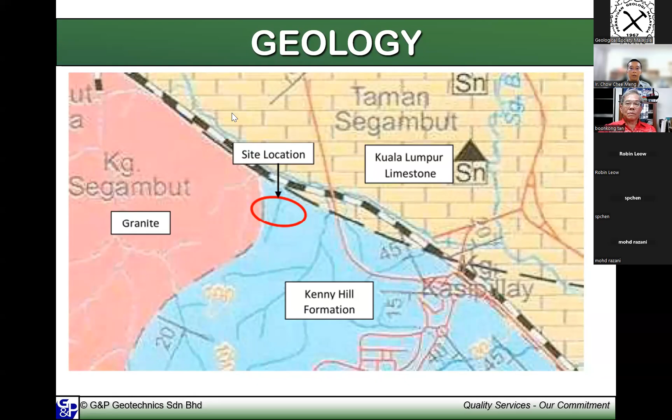So if you go back to slide 42. Slide 42, all right, or slide 41. Slide 41. Slide 41, slide 42. So if you want to build something, you have to do SI. SI is a must, you cannot base it on the geological map.

I see, just my, okay that comment. Thank you Mr. Leow, Robin. Yeah, again. Yeah, yeah, if that's what the earlier Mr. Mo question was.

Mr. Mo, I think for my approach, based on a geological map, it's a very macro overview of the site. That means it gives us a good base to plan our SI. That means we have an idea what to look out for, because if you carry out SI in Kenny Hill Formation versus granite versus limestone, there are differences to look out for. Even the number of boreholes may be different.

If you have a site that you are very sure is in granite formation, 100%, you don't need so extensive boreholes. The client has the right, just now to share what Mr. Chen said, a lot of boreholes is good, but only when it's necessary, not just for the sake of carrying it out.

So that's why the geological mapping has its use. But like what Mr. Robin Leow said, for engineering works, we still need SI for a detailed design of the foundation and all the geotechnical works. Thank you, Mr. Leow, for clarifying it.

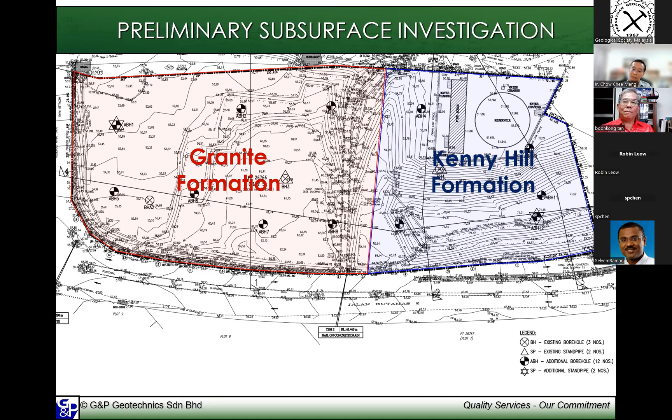But that's why for this particular site, I highlight that in the interface zone, it may not be the situation. Some of the floaters here in fact are up to 20 meter. Not all single point, but we have at least 2 boreholes that show 20 meter. But in this case, we do not stop even at 20 meter because we have enough SI information to know that granite bedrock will be encountered somewhere around 40 to 50 meter below ground.

Okay, I think our time is up.